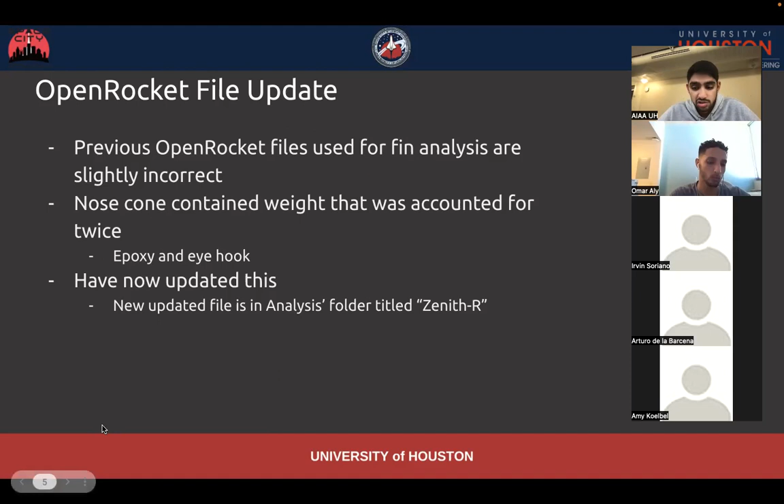So it's now updated, and the new updated file is on the front page of the analysis folder in the drive, and it's titled Zenith R. So how does that affect our apogee and stability? It slightly decreases. We're now down to 27,300 feet roughly. I did add an extra pound to the nose cone just because that's probably what we're going to have to do in the end for stability reasons, to drag that center of gravity more towards the nose cone side.

And that's why our stability is 1.6. I think without that pound, we drop down below our 1.5 range, which will not let us fly. So adding some sort of weight to the tip of the nose cone is going to be key for stability and also just being able to fly. That puts our mass at 78.7 pounds, wet mass.

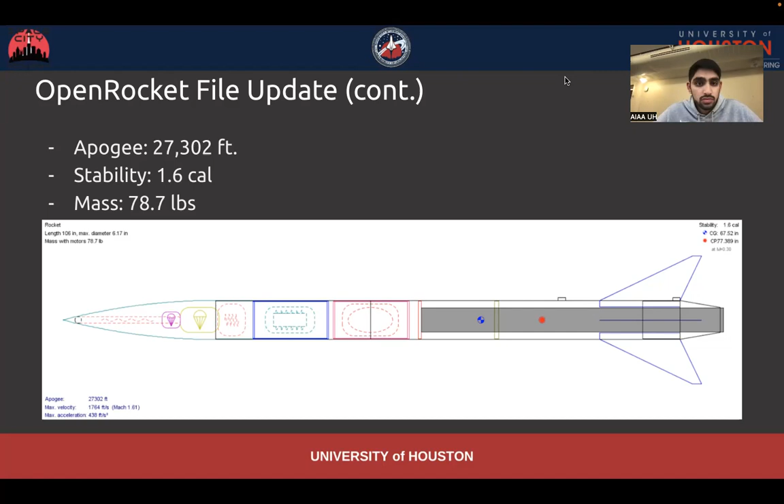So now with Zenith and the MMM, we did get feedback from our second spaceport progress report. So that's not the one we worked on, but the one Irvin submitted, and I guess the ones we have to submit to spaceport just as the year goes on.

We were told that the boat tail must have a 6-inch shoulder if it meets any of the following 3 conditions. That's if the motor is thrusting against any part of the boat tail, which is true for us. The fins are being attached to any part of the boat tail, not true for us. I guess we don't count the shoulder. And any part of the motor mount is attached to the boat tail.

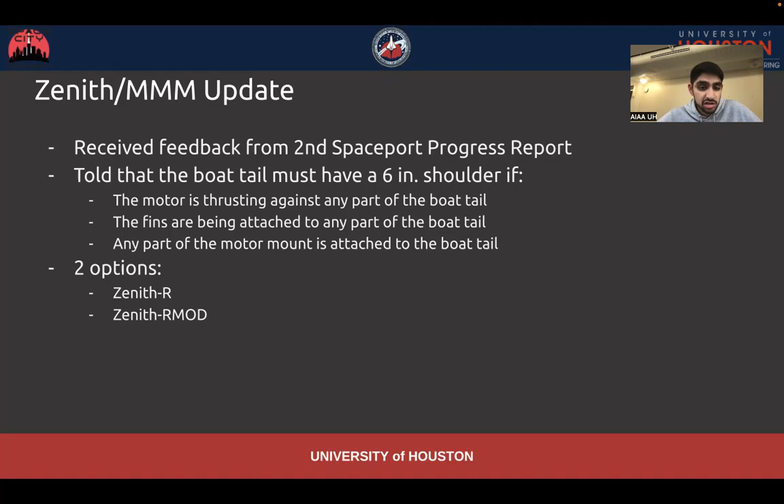So there have been 2 options that we've developed. Mainly Gustavo has come up with them and working with structures closely on this. I just titled it Zenith R and Zenith R mod. So I'll go through what both of them look like. Zenith R is what I just showed, the corrected version. That is just extending the boat tail shoulder to 6 inches. I think before it was at a 4-inch shoulder.

So the shoulder is, this is kind of the outer portion of the boat tail, and it goes into the lower airframe through a section of it that has a slightly smaller diameter. So it's just like fitting 2 tubes together. And that is what allows to do it. The nose cone also has a shoulder. It's kind of hard to see on here, but that's how it fits into the top as well. But yeah, so there's the 6-inch boat tail shoulder, and then added the 1 pound to the tip of the nose cone. Same stats as the OpenRocket I just covered.

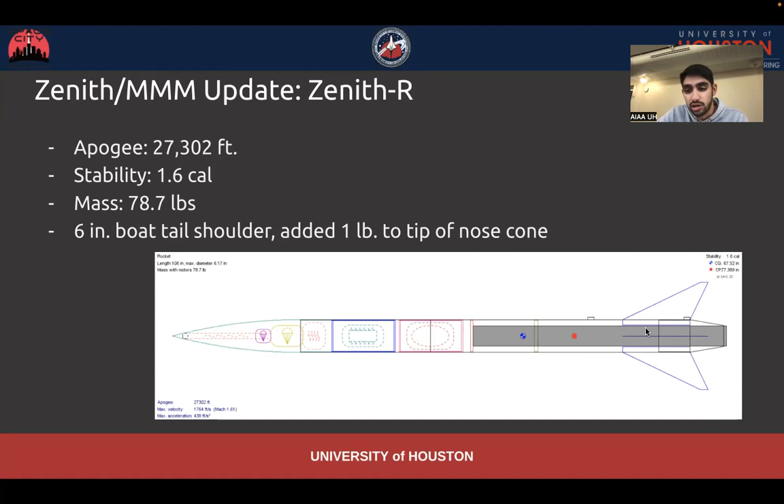I guess in regard, can you go one slide up really quick? So to start off, yesterday in the lab, I looked at Gustavo's calculator and we had to make a few changes to pretty much the calculations. One was, so the landing load that he got, we had to change that. And we got a pretty significant number. I think it started at like 10,000 pounds of force, made a couple of changes because he didn't take into account the upper airframe stuff. He was just taking into account the lower airframe mass.

So with that change, it went up to like 20,000 pounds of force, which I think we're getting to the point where I don't know how accurate that is. And then one other thing is the material of the boat tail, the fact that it's fiberglass. So the material properties that me and Arturo found, I was comparing it to aluminum, like the ones that we usually use. And essentially it was saying that the fiberglass had like a yield strength 10 times stronger than aluminum, which if you saw the picture that Gustavo was showing, the ones that they made were super flimsy too, the boat tail.

I do not know how accurate it would be. I'm hesitant to put this in the report just because I feel like so many other factors play into it. So I don't know how accurate that really is. So I'm hesitant on that. I think that may be talking about G10 fiberglass or just sheets of fiberglass kind of stacked into maybe like a block, or kind of how Oberon's fins are, versus like a sheet of aluminum.

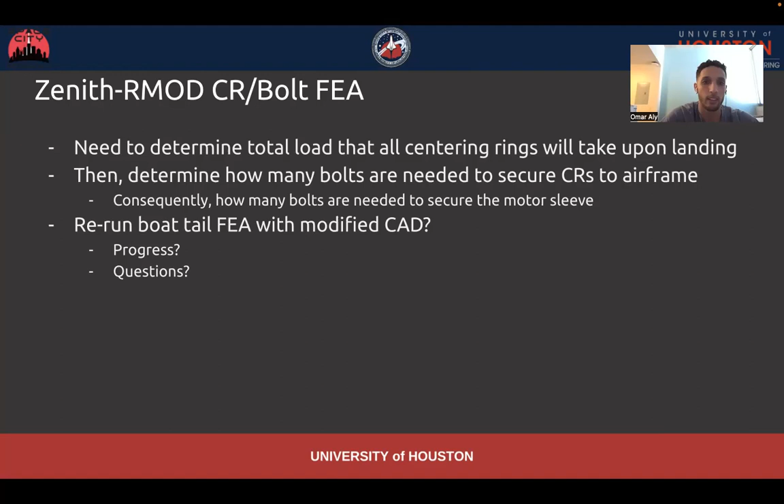But definitely not going to need something that huge. I guess I don't know if Gustavo had looked into the right dimension for it to be a perfect fit between the inner diameter of the centering ring and the outer diameter of the motor sleeve, to keep it a tight fit, but not too tight to the point where we can't actually move it around a little bit.

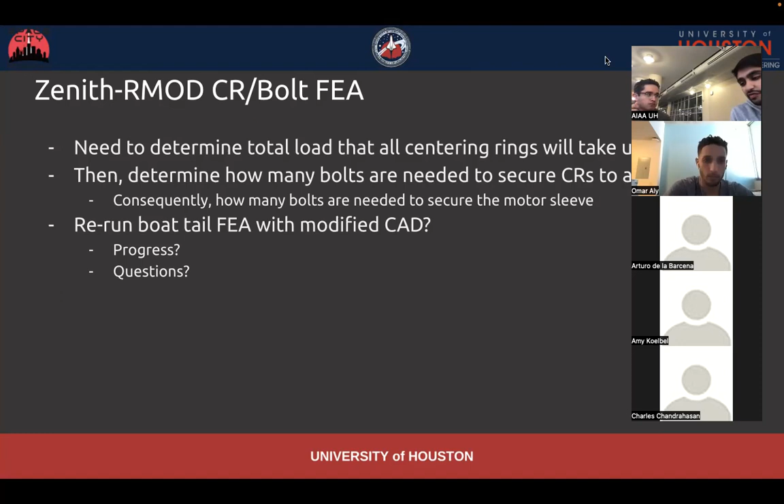I think something else to consider with this whole assembly, not really just the FEA, but the actual physical assembly. Another thing I wanted to bring up that I was looking at yesterday is the bottom launch lug. If there's a boat tail, how the fuck do you put it on? I don't think you'd be able to have a hard point. Yeah, unless you put the hard point inside the boat tail.

Right, so sort of how we did the bolts for the payload. You just have no way of securing it unless you could reach through the bottom. No, but the same way we did the payload bolts where we epoxied them together, you could epoxy the hard point to the inside of the boat tail. Oh, yeah. But the question still stands, does that break the rule of it has to be a 6-inch coupling if it has a hole going through the coupling? Yeah, that whole dilemma of what is a shoulder, and if we're cutting slits through it for the fins, if it still counts as a shoulder.

I mean, I don't know. We don't know. We'd have to find that out. But I think for us to focus on this FEA and try and look at what this solution could look like, if it is possible, if it's a viable option, then that's what we need to focus on and, I guess, come up with the answer for.

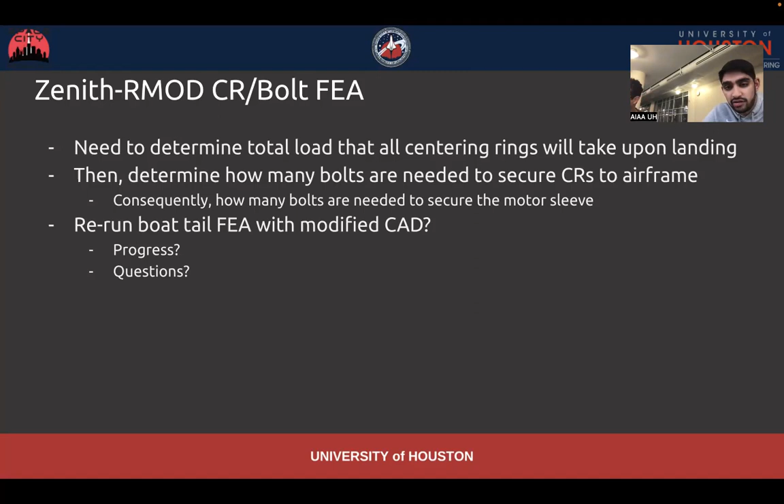Yeah, that was all I had for today. If you have any questions about anything, I know I didn't talk about any of the other projects we're working on. So if you have any questions about that or just kind of where this fits in the scope of things, then feel free to ask. I know it can be a little confusing.

Yeah, just one more thing. Omar and Gus, do you guys have time anytime this week just to meet and just say exactly what you're thinking of, Gustavo? Because you're throwing out a lot of ideas, but I'm not too sure what you're visualizing. Yeah, that's my fault. I tend to do that a bit, but I have a CAD that I haven't shared with anybody, but I'll share it and then try to give everybody a good example of kind of what's going through my head. All right, yeah, that'd be perfect.

Thanks. No, we have our lab tomorrow from 6 to 8. I don't know if Arturo or Gustavo or Omar, if you're all planning on. I do have a meeting at 7 tomorrow, I think. Okay. But other than that, I should be able to. Okay.

I just had a quick question. You guys mentioned hard point. Can you kind of explain exactly what that is? Yeah, so you can see it somewhat on the OpenRocket, but you see these two, I guess, launch rail, launch buttons, launch lugs. So when we launch, we load the rocket onto a rail. And the way the rocket stays on the rail is through these kind of buttons or points. They'll slide onto, like if you've seen T-slot aluminum, it'll just slide right through that and keep it upright for launch.

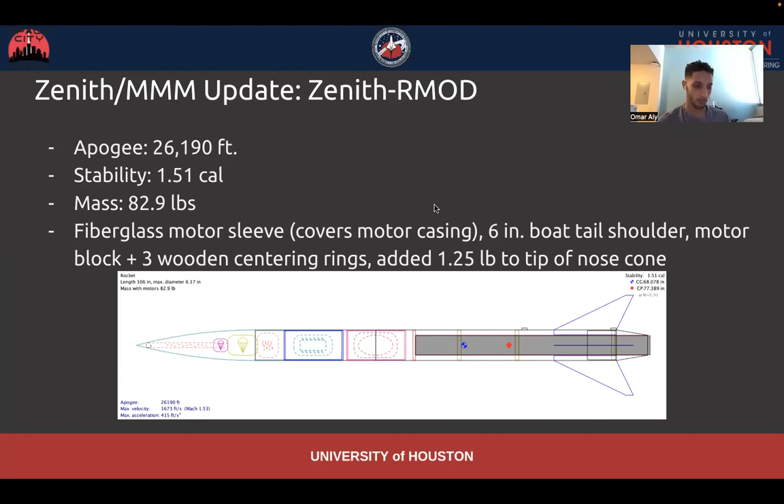Okay, I'm gonna share my screen real quick. Go ahead. And then I'll post the CAD. But this is essentially what's going on. I'm gonna get rid of everything real quick. Okay, can you guys hear me? Yeah, I can hear you.

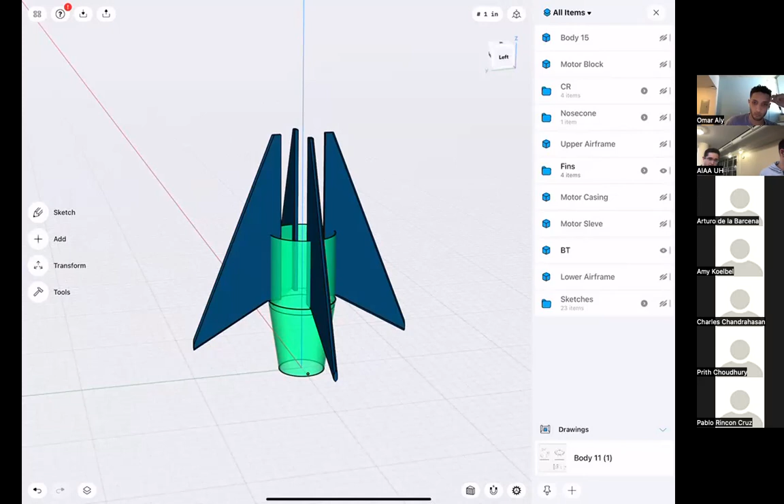So we have the boat tail, and the problem is that if we have the boat tail and we add the fins to it, then the fins intersect with the shoulder on the boat tail. So that's really the big issue. How do we get it to where we have a shoulder that's strong, 6 inches long, and has fins going through it? One way to circumvent that, which is I guess what we're gonna go for from now on, is adding a motor sleeve. So it's a sleeve that goes around the motor, and this is what the thrust is going to go through. So when I add the motor right here, you can see that the lip or the thrust ring on the motor pushes against the red tube and not the boat tail.

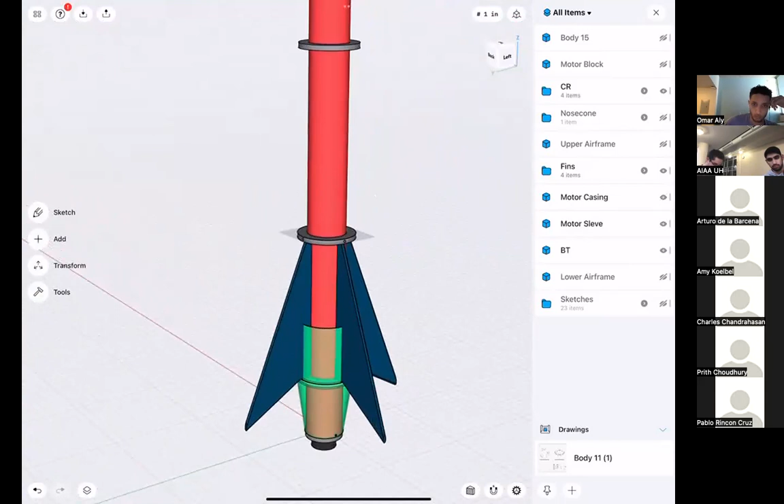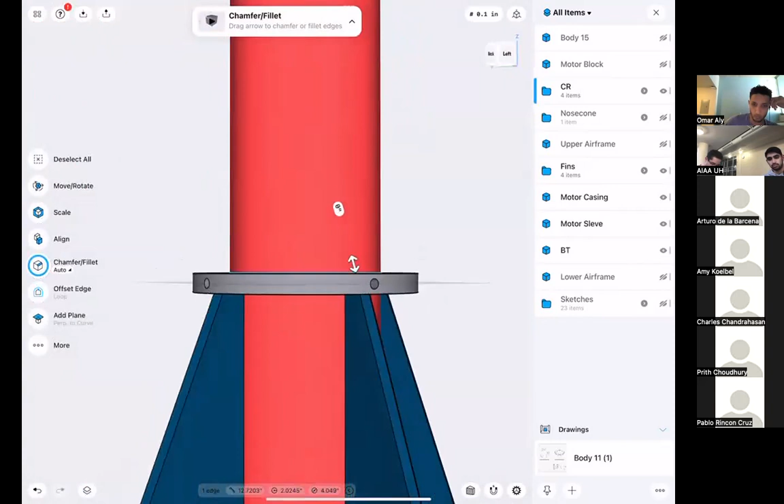And to transfer the thrust into the airframe, we're going to add some centering rings, seen right there, and they're going to have some holes in them. And this lip of the centering ring is going to be epoxied. So same thing, top and bottom, and then it's just going to be a strong mount to the tube. And these holes are going to have bolts that go to the lower airframe right there that goes over it. So that's really the idea that's going on.

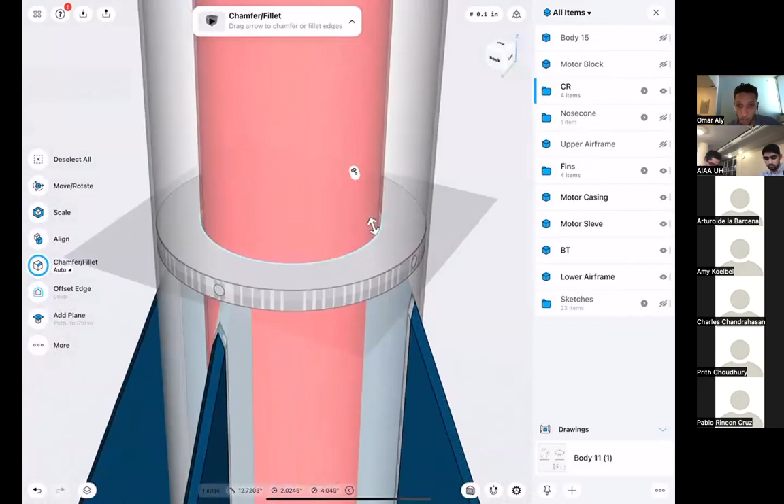I don't know if you meant to, but you said that lip of the centering ring and you highlighted the ID of it. You said that's gonna be epoxied? Yes, that's going to be epoxied to the red tube. Hmm, okay. I didn't know that was gonna be epoxied on it too. Okay, yeah, and then these holes only go like 75% of the way in.

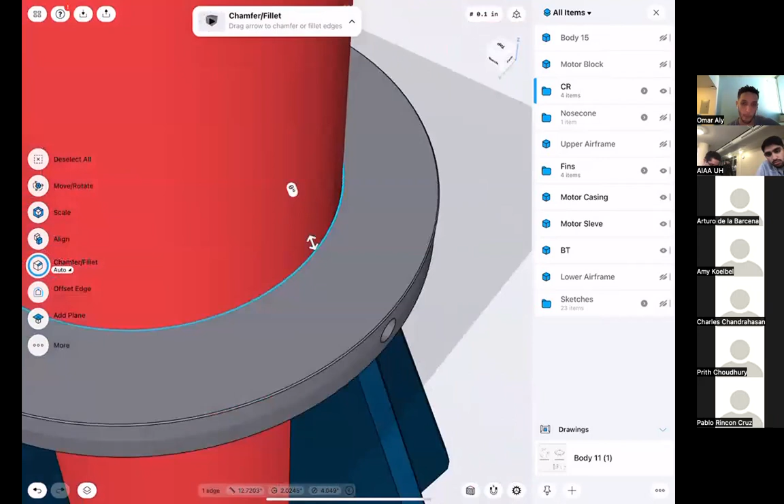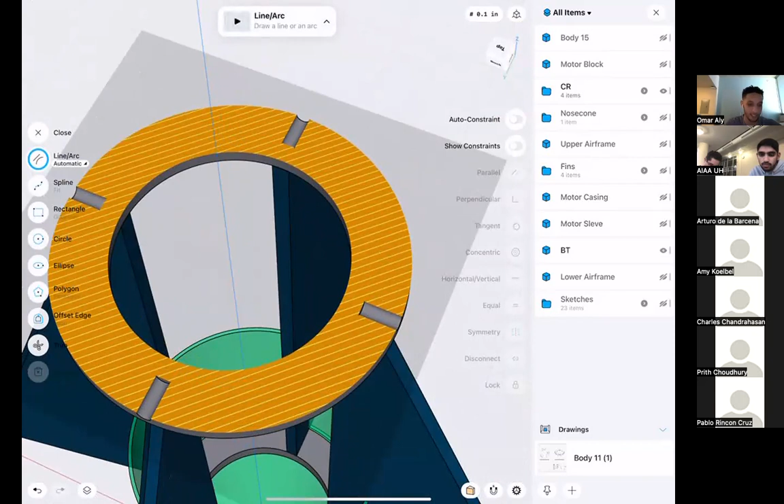Like they'll stop somewhere. Actually, can I do a mid plane of this? So let's get rid of these two. This would be the cross section of the thing. Right. How far in does it go? I think you said like 75% of the way in. 75%, okay. I'll get rid of this. Okay, so pretty much we can assemble this whole thing and just slide everything in. That's the plan. That's the idea, exactly.

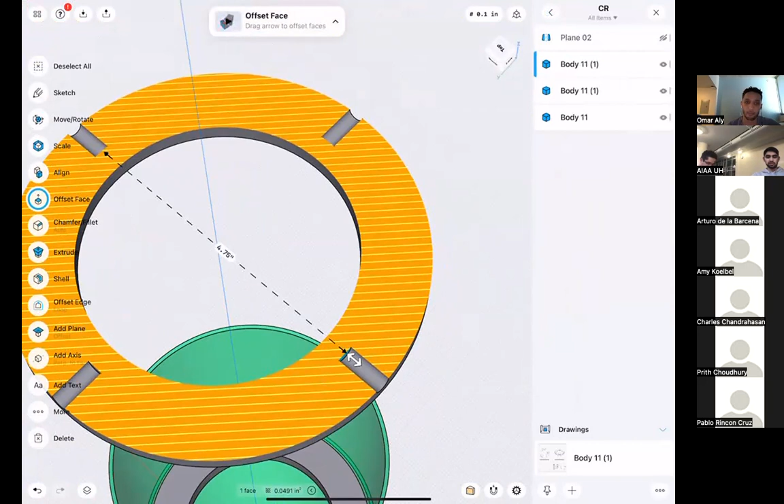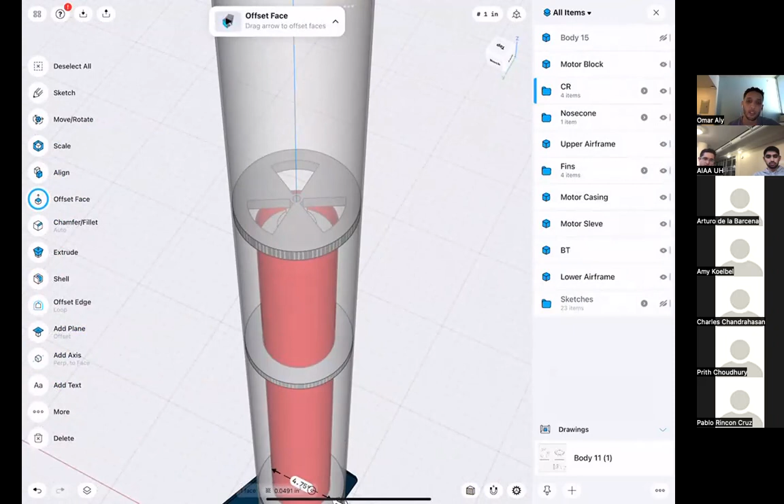The motor retention ring at the top, that's what it's called? At the very top? That might not be in the CAD, I'm not sure. What are you talking about? I think you mean the motor block. Or the motor block, that's what it's called, the thing that goes right here. Yes. One thing I assumed, just a random arbitration. Okay, I just want to make sure I understand this. So that motor block stops the motor from flying up the airframe? No, it keeps it from falling out of the airframe.

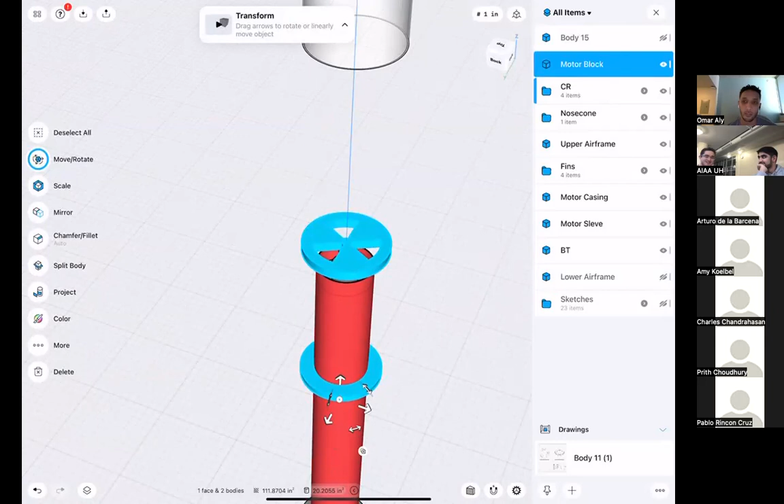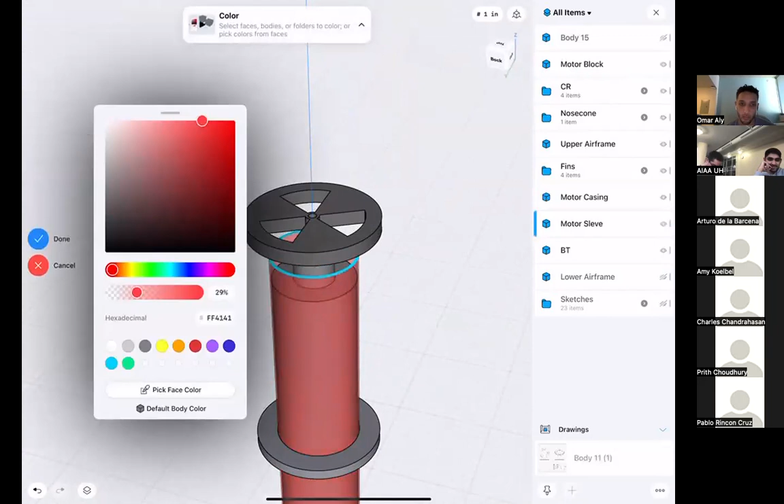Oh, I guess actually, if we're gonna have these centering rings, I think it defeats the purpose of this. No, actually, it doesn't. That was a hot take that was not correct. These centering rings hold the tube, but not the motor casing, which is this thing. Right, I can make this more transparent. So the centering rings hold the tube, not the motor casing.

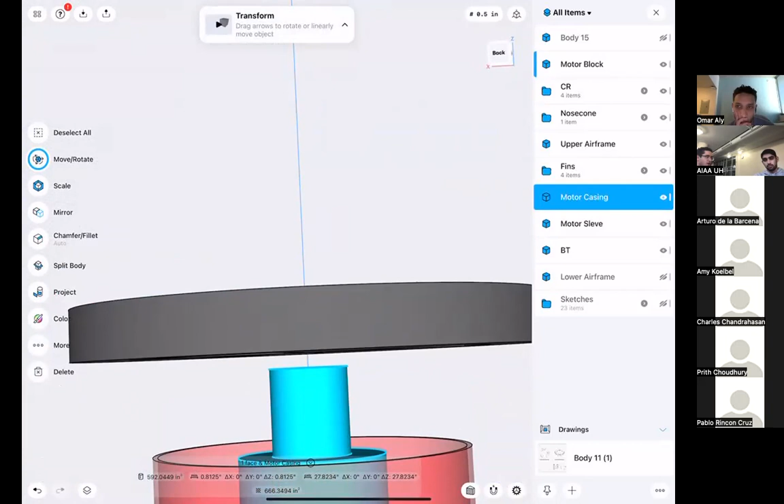The motor casing is going to be held in by this block because there's going to be a bolt that goes in from the top, and there's going to be no thrust because we'll put in a little lip, or sorry, not lip, so there's no thrust transfer from the motor through that ring. So this pretty much takes the job of the motor retaining ring. Yes, correct. Remember, Omar, how I was telling you on Oberon, on the MMM assembly, you have the motor retaining ring at the very bottom, and that would go into the thrust plate.

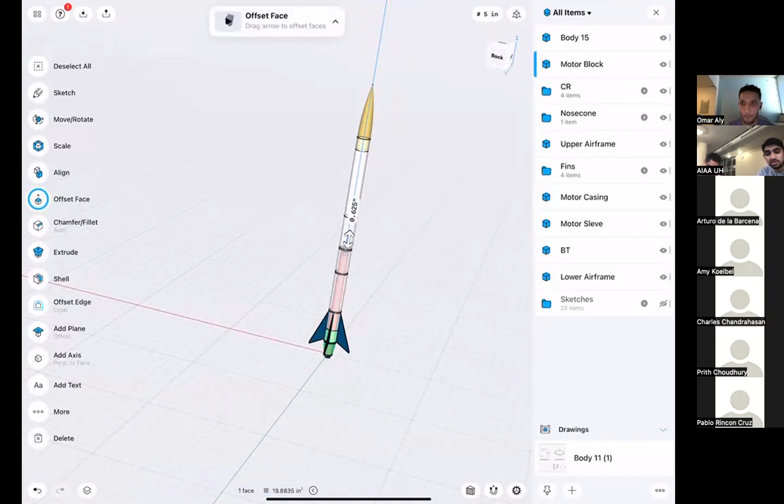Yeah, so the motor block just holds it from the top instead of preventing the fallout from the bottom. I have Zenith here, I can try. I don't know if everything's CADed into this. Yeah, I guess, oh yeah. So this was the motor retaining ring from before, and the block at the top is taking that.

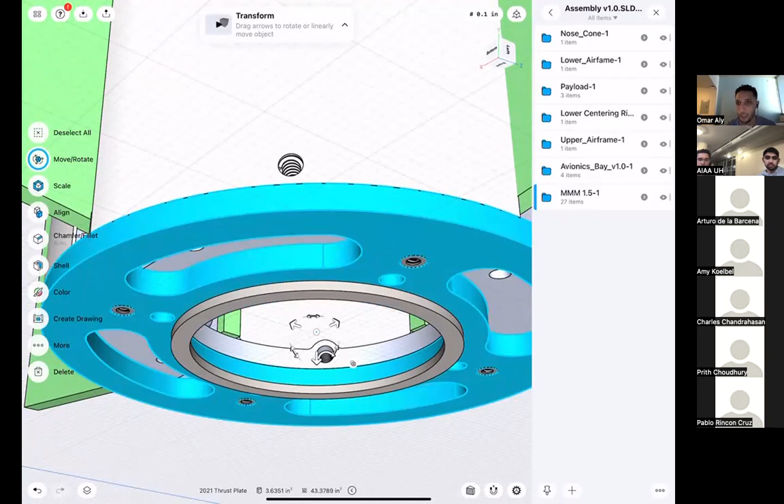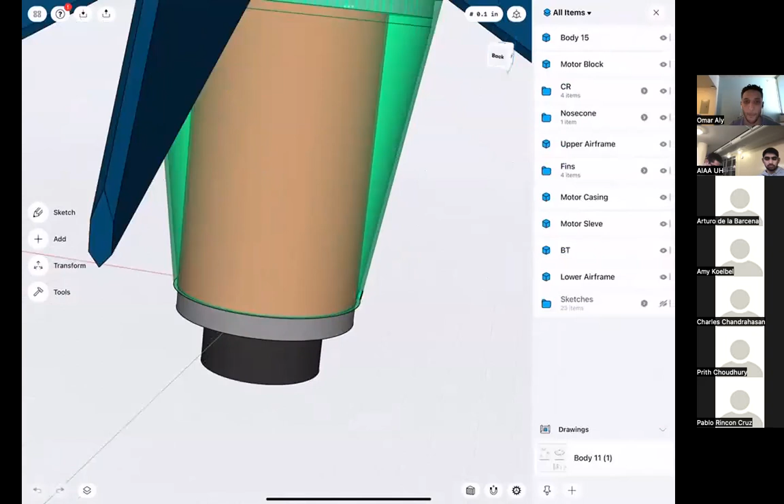But the block right on top of that was taking, not the highlighted part, but I forget the name. That thing, yeah. Is that the motor retaining ring or the thrust plate? The thrust plate. So that was taking all the thrust from Oberon's motor, right? Yes, correct. So in Zenith, what exactly is the part that's going to be taking all the thrust then? If I get the motor, I'm gonna slide it down a bit.

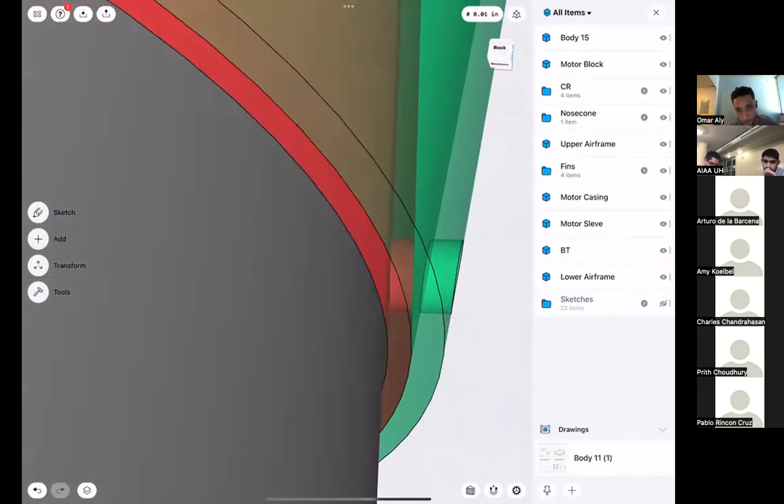There's this lip on the motor casing. I don't know the exact size of it. It's like 0.075 or 0.025, something, I don't know. But there's a little lip that will push against this lip right here, like the edge of the red tube, right, the motor sleeve. That motor sleeve has these rings epoxied to it, right? And those rings are bolted to the airframe.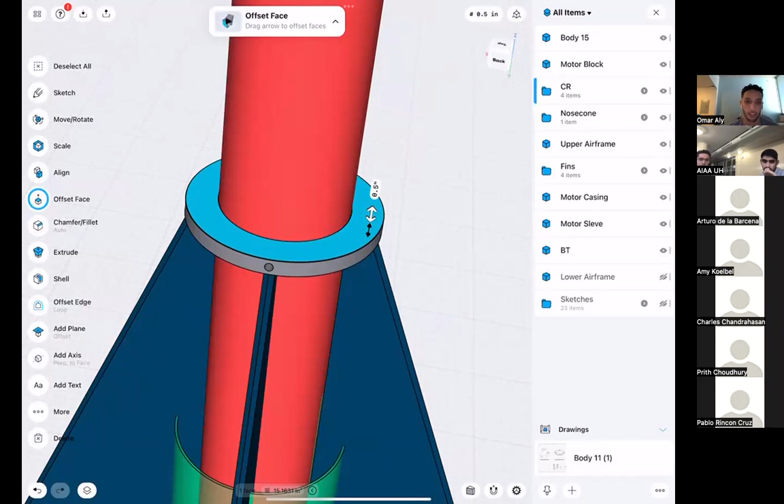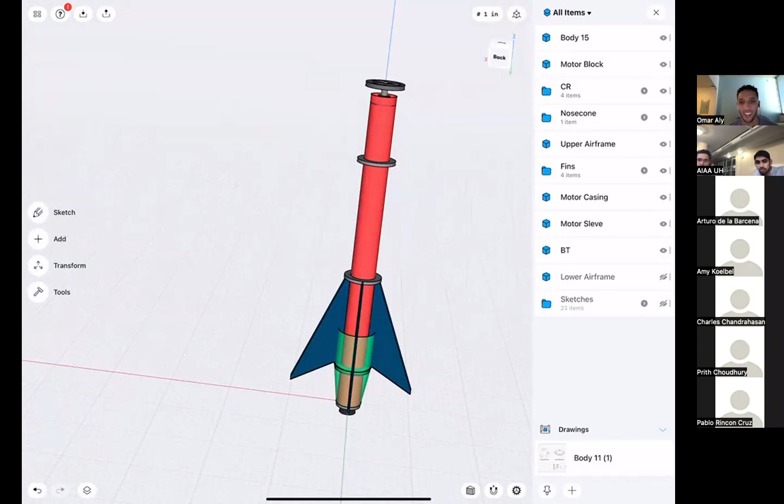Okay, so now I see how the centering rings are taking all the thrust. That makes sense now. I guess I was just confused on what exactly is happening with the thrust and what's actually taking all the load. But now I see why the centering rings are going to be taking it. So last question: since the centering rings are taking them, the motor retention ring at the top, that's literally taking no thrust at all?

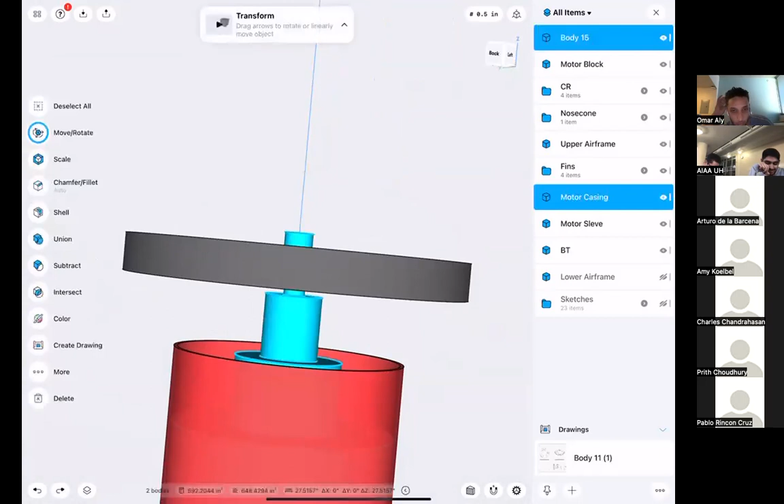Yeah, the whole idea is we have this bolt right here that is free to move up and down, right? Well, okay, so these are going to be bolted together. I can't do both at the same time. My thing just starts lagging when I do both of them for some reason.

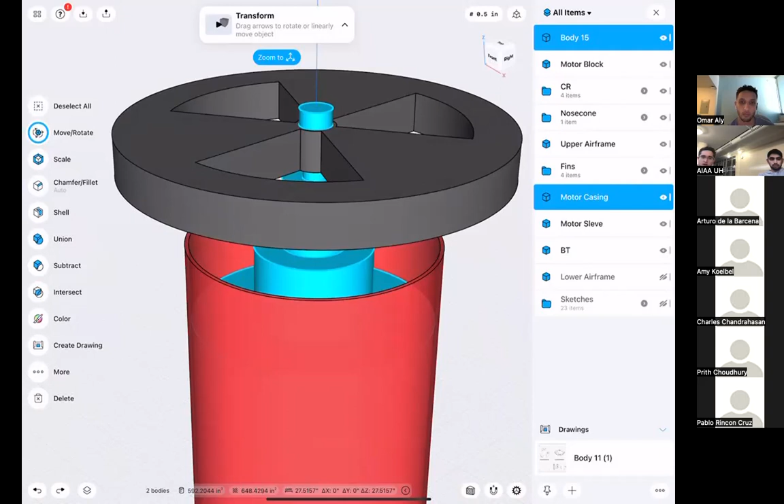But the whole point is that this bolt is going to be bolted into this hardware nut that's at the top of this, and it's going to be free to basically move up. So if there's any bending or anything in the wood, it won't push against the motor block. But if this bolt wants to move down, it can't, because it'll be against the block. And that block is screwed into the airframe. I'm counting the holes, but there will be 4 holes, I believe. Okay. I have a question.

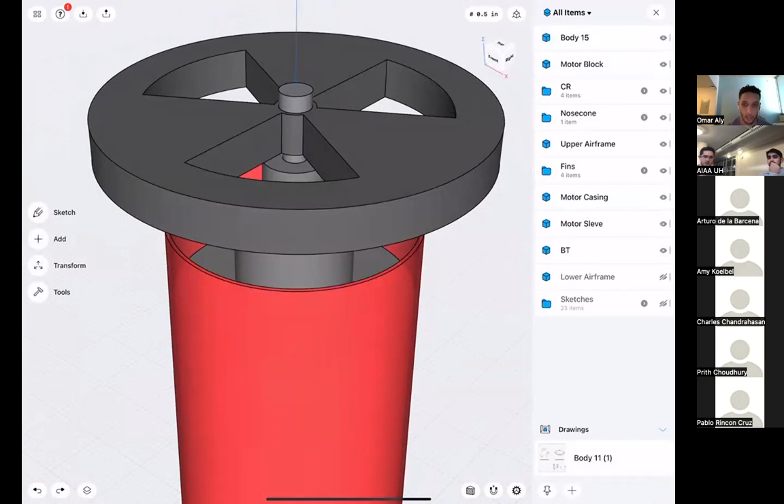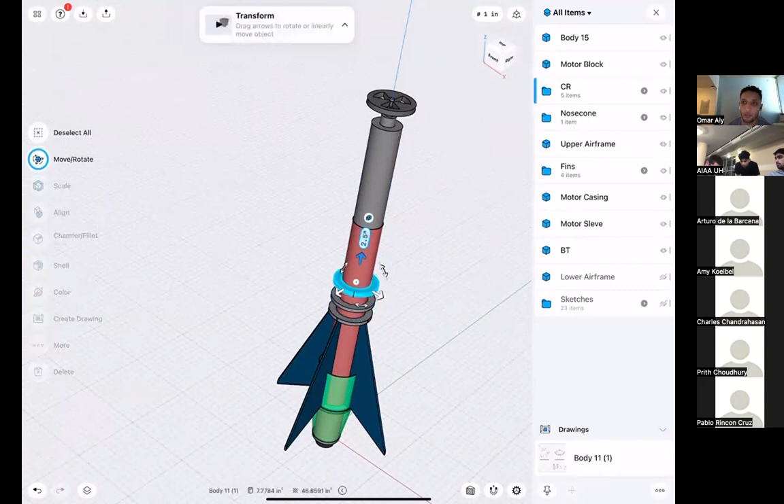So for the red motor sleeve, why does it have to go all the way up? It doesn't. If we wanted this to be here and this to be here, technically we can do that. That will take away some weight. Wouldn't that worsen the weight? It may take away some weight, but it may redistribute some weight. We take away the weight that's near the CG, so this would just push the CG back a little more.

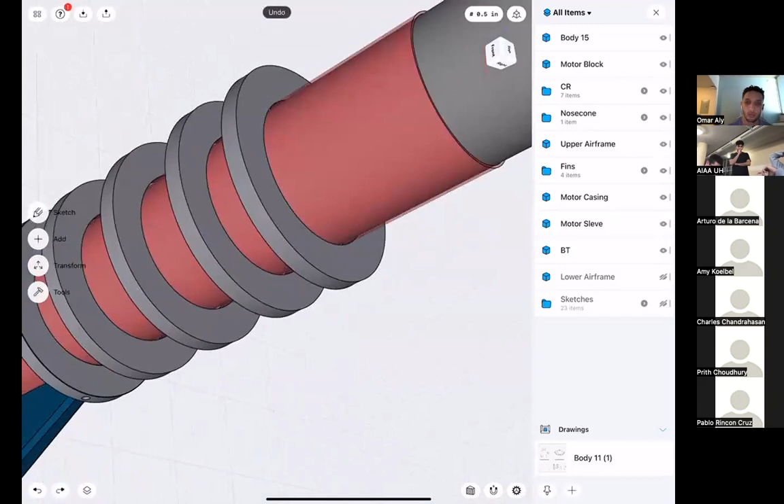But also, I think what we have to consider is the location of the centering rings. How will that impact the load that it's going to take when it lands, if it's all at the bottom? Yeah, that's what I was thinking too.

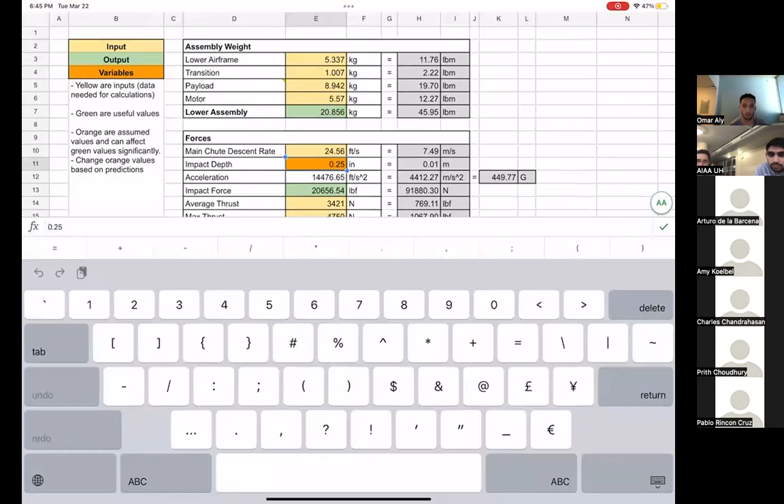I have this. I don't know if you guys looked at it yet, but essentially, with a worst case scenario of it hitting the ground and only being able to sink in 1/4 of an inch, which is not much at all, we get 20,000 pound force of landing force, which is significant. So I'm not so much worried about the thrust; the peak thrust is, let's say, 1,000 pound force or 4,000 newtons.

Wait, acceleration, aren't we on the main chute coming down at a constant velocity? Yes, it's coming down at a constant velocity of 24.56 feet per second. I grabbed that from the last progress report to the spaceport, from Carlos. That's probably the latest number. Might go a little higher because of the additional weight, but that's a good enough estimate for now. And it goes into the ground 0.25 inches, which means it has to decelerate at 450 G, which is 20,000 pound force of load, based off the empty weight.

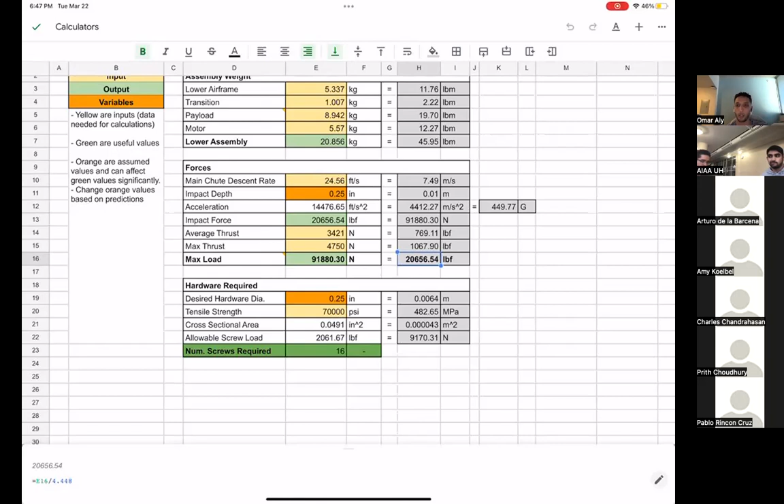I have a question now that we have it up. I don't want to waste too much time for the general meeting, but for the centering rings, assuming we're looking at 20,000 pounds of force for the load, let's say we only have 3 centering rings. Are we going to be dividing that 20,000 pounds of force by 3, or does each centering ring have to withstand the 20,000? I would divide it by however many centering rings we have, right?

Won't it be different for each based on where it is in the airframe? I mean, you can make an assembly from the entire model and just add a force coming from the motor itself. Yeah.

I think it would be easier than trying to isolate each centering ring and trying to calculate what the force on each would be. At first, I just said I wanted to see if there was a centering ring shape where the stresses would concentrate, and then basically assume that that's what the wood has to withstand, and then whatever amount of centering rings we need to get it below the strength of wood was my initial quick and dirty way of calculating it.

But if you guys want to take this assembly, put a whole bunch of centering rings on it and see how many it takes before you can get to the 20,000 without it failing, then that'll be good too. I'm not really concerned with how we get the number, just some way of having something to work with.

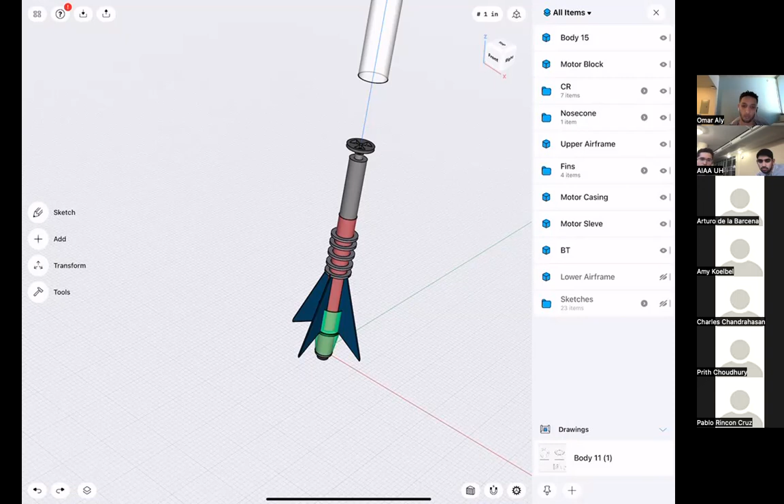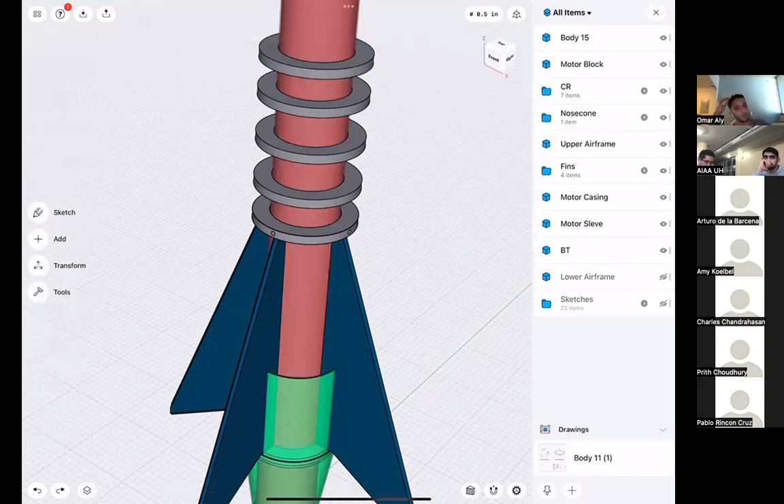Okay, so to recap everything, there's going to be a bolt that goes through the airframe, then the centering rings, and then 3/4 the way through the sleeve, right? And then you said that the centering rings are also going to be epoxied to the sleeve. Yes, so the rings are epoxied to the sleeve, and that's going to be one whole unit. So if I could get rid of this. This is just going to be one part. This is going to be our MMM. This slides into the airframe.

And once we put the airframe over it, once I add the airframe around it,

Oh my God, this feedback is killing me. I cannot mute, not on Zoom for iOS. It's so stupid. I can put my AirPods in, and then I'll just do it. Sorry about that.

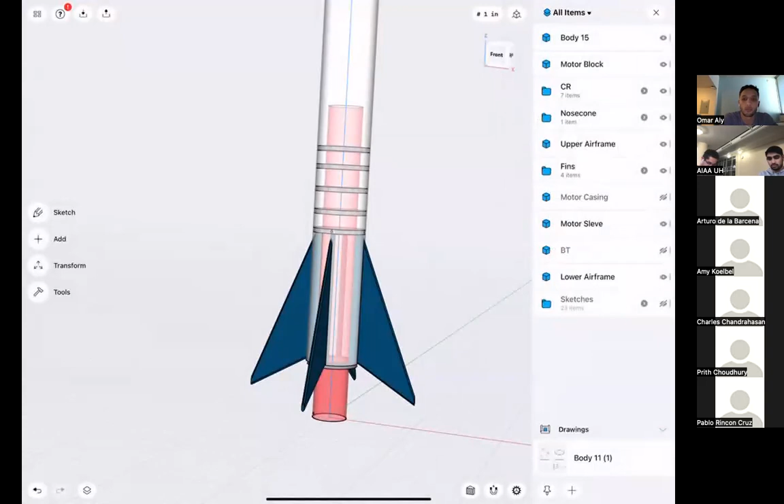So once the airframe comes over it, there's going to be bolts that go through and attach it at each one right there. Okay, yeah, I got it. All right. Chris, if you want to go through and see if we add a whole bunch of bolts to the outside and practically bedazzle the airframe, what is that gonna do for our drag.

Remember the screws that were in line? My concern is, if smooth versus rough paint has such a huge effect, how much do 16 extra screw heads do? What if we airfoil the screws? They practically are. I mean, we could fill it in with hot glue just so they're round. Tape.

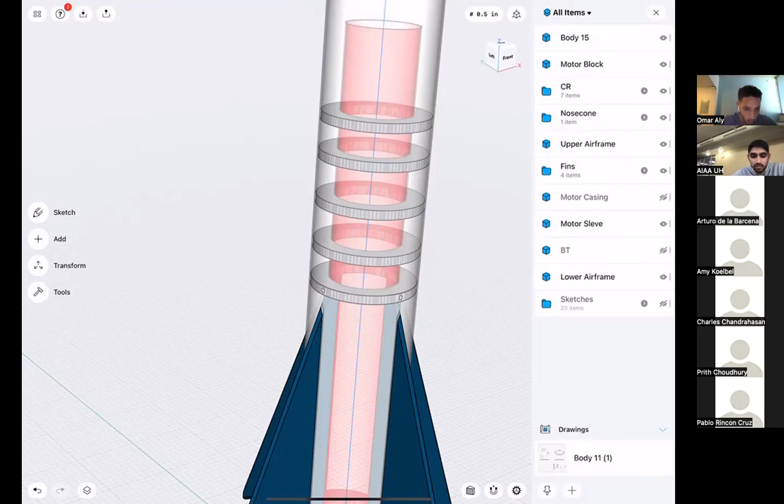All right, yeah, I guess if we have a CAD, let's start with the 3 centering rings for the CAD, and then you can upload the CAD to the drive, and then Griff, you can look at the CAD and see where the centering rings are, and then each centering ring will have 4 screws 90 degrees apart on the outer section.

I mean, you know what's crazy? Sounds good. I thought that was you over there.